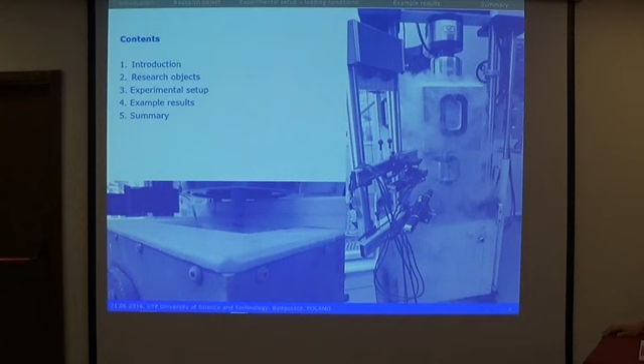After a short introduction, we will present the research object, some aspects connected with the experimental setup, a few results of our test, and a short summary. The main range of application of this material is aerospace, mainly outer space, and aviation and industry.

Such materials must meet a lot of requirements. The basic first of them is low weight, of course, but also radiation hardness, ballistic resistance, and of course resistance to crack propagation. If you want to use a homogeneous material for such a purpose, it's not easy to fulfill such requirements. One idea how to meet these requirements is the use of a layered material like this, built from more than two quite different materials.

The next problem is how to join such materials, how to build such layered material, especially if you want to use metallic material. One of the methods is explosive welding. This method was developed in the 1960s. It was introduced in the industry. This method uses explosive material which covers the clad material. The explosion produces a kinetic wave, which builds a specific bonding zone of the material.

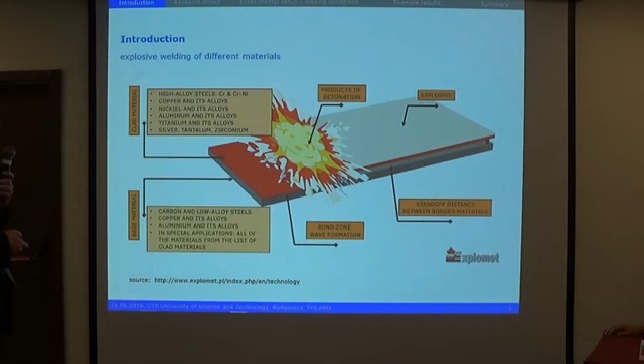This bonding zone is very well explained in a lot of publications, so I will show you only the results of our test without the explanation of the microstructure. We can join a lot of different materials with this method. Our material was developed with the cooperation of a few research institutions from Poland and a company called Explomet, which is a very experienced company in Europe. This firm delivers a lot of different layered materials built with this technology.

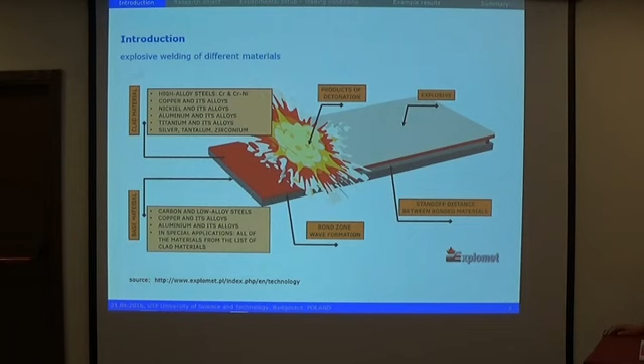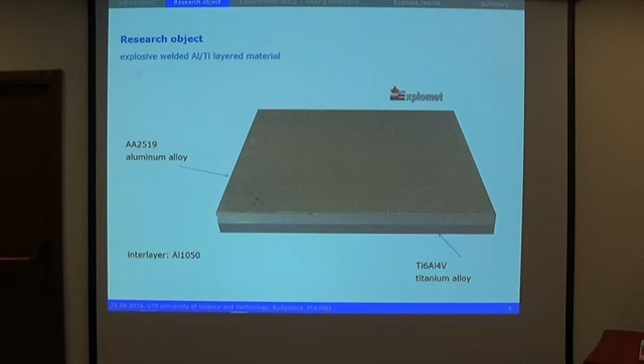Our material is a composition of two alloys. The first one is titanium alloy, here's the description, and aluminium alloy. The materials are mainly used in the aviation industry, for covering, for example, airplanes. Additionally, an interlayer was used. It was aluminium alloy Al1050. This material was used for improving the process of explosive welding. Of course, such technology requires a lot of heat treatment before and after the joining, but it was described in another publication.

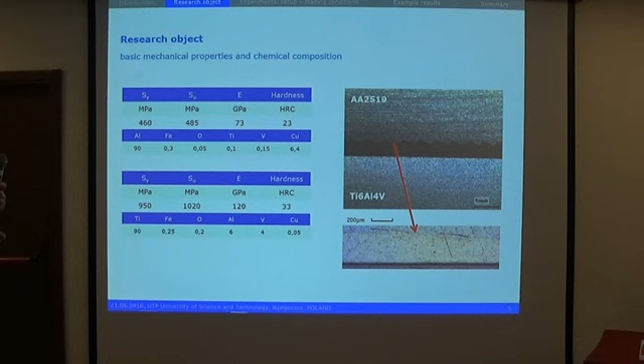The chemical composition of the base material is shown in the slide. This is the aluminium alloy, here is the titanium alloy, and here is the view of the complex bonded zone. This is a typical shape of the wave, where we have different processes of joining of the material.

For the test, we have used 3 types of specimen. The first one is the standard tensile specimen, used for the tensile test with typical hydraulic grips. The second type was the pin-loaded tensile specimen. Such specimens were used when we made tests with a special cryogenic chamber, and the last one was the typical compact tension specimen.

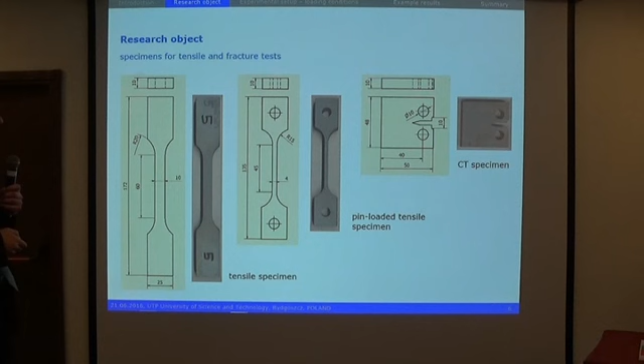A specific feature of all of the specimens is the thickness, because we used different materials, but we want to compare the results taking into account the final thickness of the material. All the plates have a thickness above 10 millimeters. The dimensions of the specimen are according to ASTM, and the ratio B to W was 4.

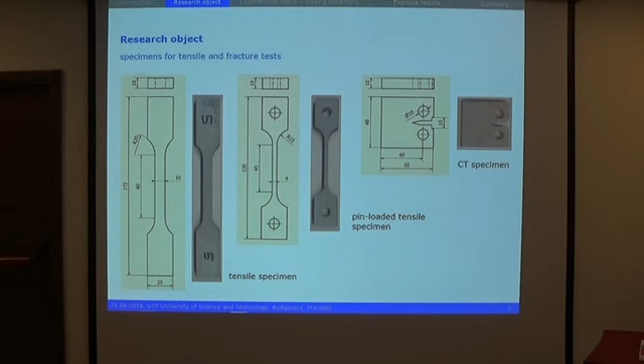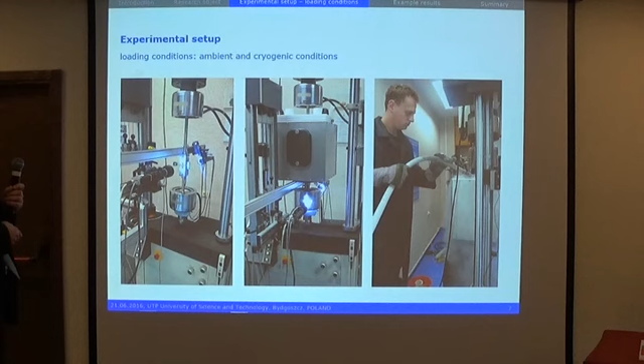Some words about our experimental setup. We used a typical fatigue testing machine, but not typical was the chamber, which gives us the possibility to use liquid nitrogen. The specimen, grips, and other equipment elements were immersed in the liquid nitrogen, which gives us the required temperature condition. And here is the process of filling the chamber with nitrogen.

The tests were, of course, realized in both conditions. For ambient, it means about 20 degrees Celsius, and in cryogenic condition, it means about minus 197 degrees Celsius. Of course, during the test, we have measured the COD in both conditions.

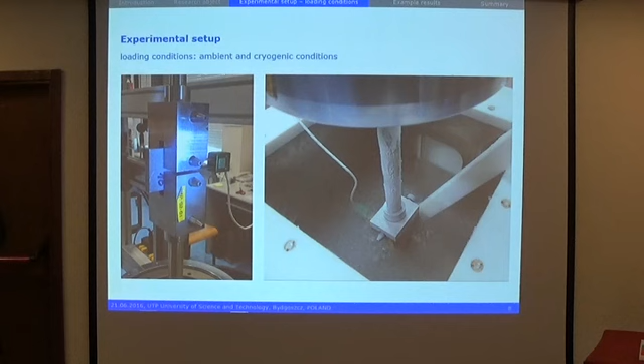Additionally, in ambient condition, we have the possibility to measure the crack length with the use of special equipment. In this type of test, it was mainly used for preparation of pre-cracks in specimens. Why is it important? Because we have two different materials in our layered material, and the crack propagation in aluminum and titanium alloy is different, and it was necessary to measure the crack length on both sides. It was done using the system which is called Effective View, with special software which uses a digital image correlation method.

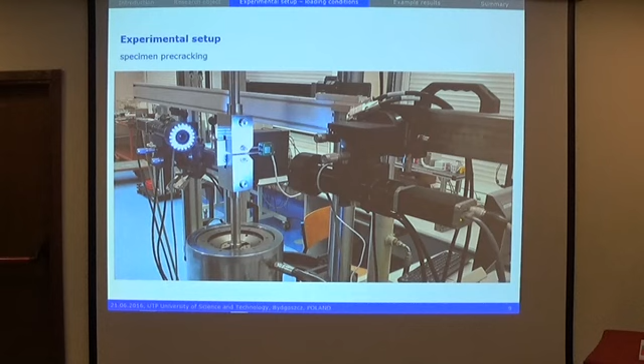During the test, one moment, it should be a short movie.

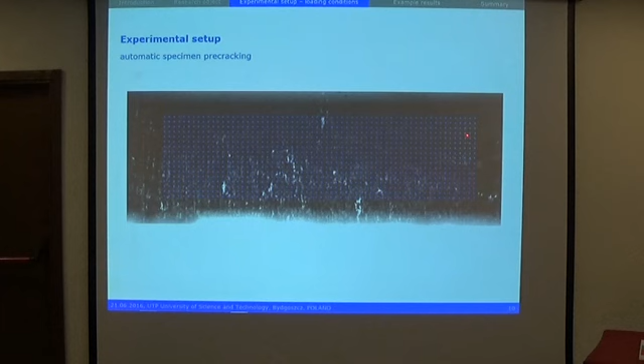Okay. During the test, the displacements of the points around the crack were calculated, and on the basis of gradient analysis, the actual position of the crack end was determined. So, this procedure was involved in the computer code for system control, and after achieving the required length of the crack from one or the second side of the specimen, the system was stopped, and we obtained the specimen with a very similar length of the initial crack.

Analysis of the pre-crack surface of titanium, aluminum, and layered material shows that the preparation of a proper crack line in the compact tension specimen is very, very hard and difficult, and the only answer is to produce a lot of specimens and check only the good specimens after the test.

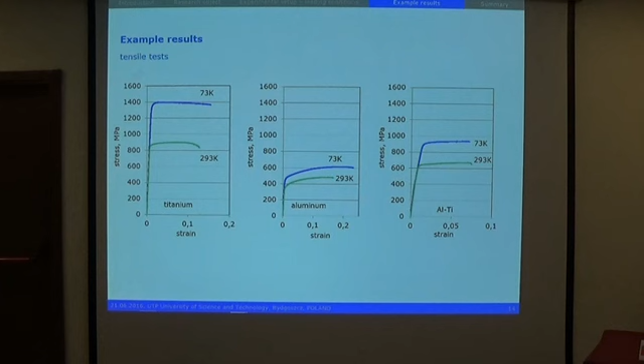If we compare the microstructure of the cracks after the test, we can observe that in cryogenic condition we have a more brittle situation, and of course we can also observe the delamination effect, debonding of the material as a result of the stresses which exist inside the material.

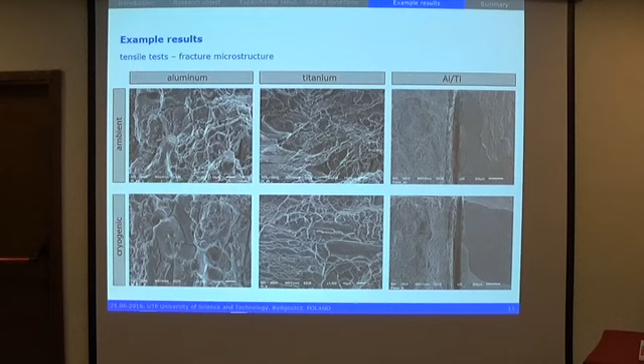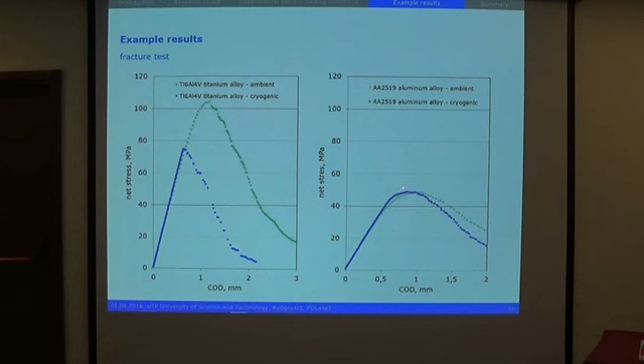If we compare the result of the standard fracture test, the result is the opposite. Yes, in cryogenic condition, the fracture toughness is lower than in ambient temperature, and for titanium, especially for aluminum, the ultimate stress is very similar, but the slope here is different, and it means if we use the equation from the standard for cryogenic condition, the KQ value will be a little bit bigger than for ambient temperature.

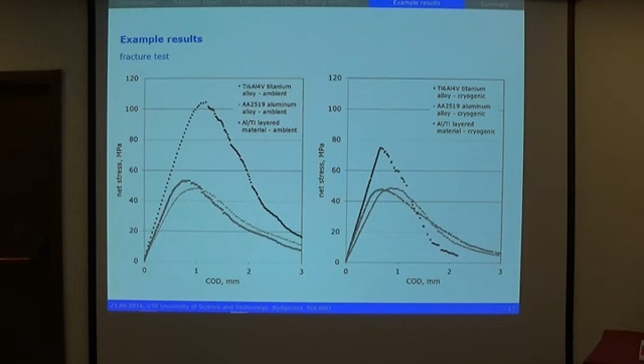If we compare different materials, here is aluminum alloy, titanium alloy, and our layered material. There are very big differences between materials, and the layered material is between the values. And for cryogenic condition, of course, the parameters describing the fracture toughness are lower than for ambient temperature. And here is the comparison of our layered material.

Here is the comparison of the results of the test. Here is the net stress, not the force, because the cross section of all of the specimens was not the same value, and it gives us a better condition for comparison of the results.